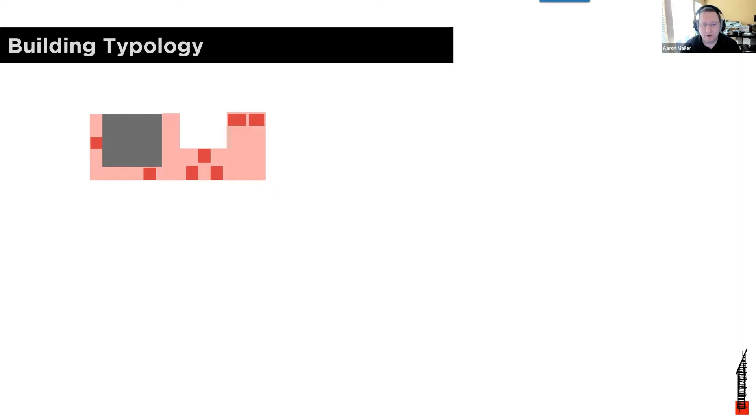So kicking this off, a lot of folks ask us, we have a lot of clients that do multifamily work. Whether it's tower and block style, where it's one large building and there's a bunch of different unit types within it, or whether it's something like garden style. And the reason I want to talk about building typology first is, unfortunately, when people ask us the whole links versus groups question, they think it's a one-size-fits-all answer. And it is, but there are some asterisks that we have to put on top of it.

So as an example, in a tower and block style building, there's really only one sub-element, and that's at the apartment level, right? So you've got a bunch of different apartment types, but there's really only one sub-element. That's a little different when you're doing garden style or multiple building scenarios, because now you've got the project as the whole, and then the first sub-element is, of course, the different building types, but then there's a sub-element of the building type, which is the apartments and the units. And while that's a nuanced difference, we do need to talk about it, because I would never tell any client that either links or groups work in both of these situations for every level of the subdivisions.

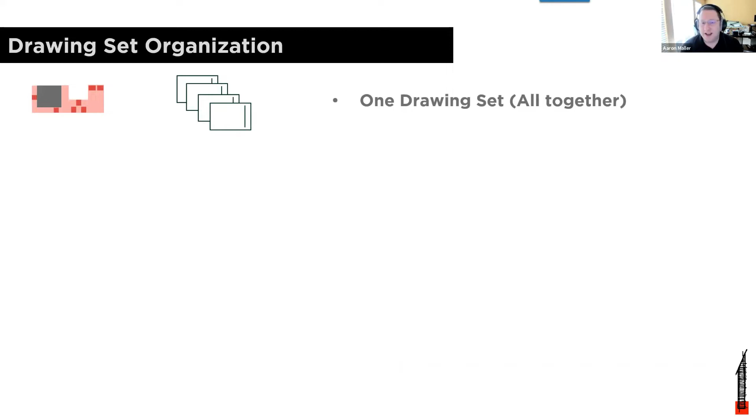Okay, so one of the first things that we're going to talk about is one of the first questions I ask project teams when they ask me how to set up their model: what's the drawing set organization, or how does the project need to go together? Because the top one is the simplest setup, right? So it's a block style building. There's one set of drawings. Everything is getting issued in that one set of drawings. So that's pretty basic.

Thank you. Okay, so the second setup is that there is one big drawing set. Everything is going in the one drawing set, but it is garden style buildings. And that is a bit different than this bottom option, which is that it's garden style, but each building is going in for a different permit, and they are completely different sets of drawings. Our answer to how to set that up in terms of links versus groups is going to change in those two situations. So that's why we want to acknowledge first that there are different drawing set organizations.

And one that's not really common in multifamily, I don't find, but it was very common in the retail world, is even when you have garden style multiple buildings, then the question does come up, are the drawings oriented to each building, or is the entire project just subdivided regardless of building orientation? We used to do this a lot for shopping malls because according to the code, even though malls had freestanding buildings, they were often evaluated as one large building because things like fire trucks couldn't get down the concourses and such. So anyways, we'll come back to that in a bit.

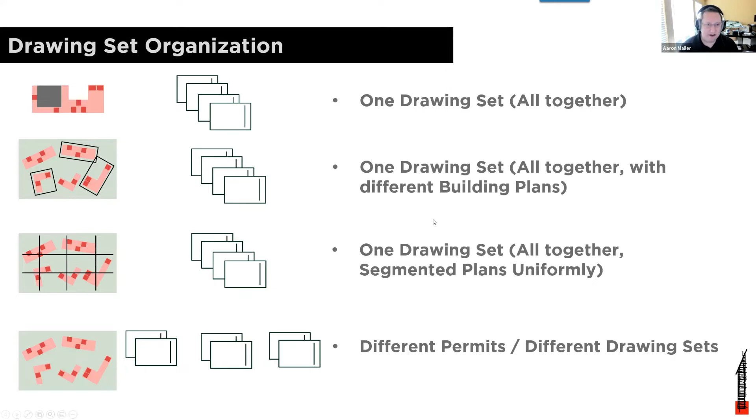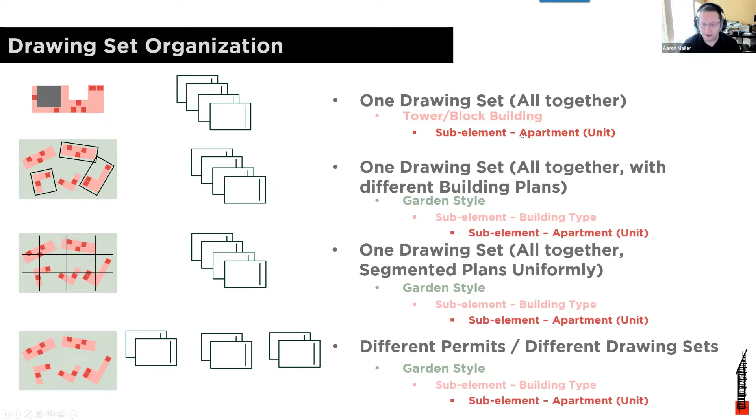I just wanted to kind of cover that in these situations, there are, again, different levels of sub-elements. So the tower and block building is the only one where there's just one hierarchy level. Okay, so let's cover basically the two easiest cases, and that is the apartments themselves, the bottommost level of hierarchy. And that's the one where, surprise, surprise, if you haven't already heard me talk about this, or if you didn't know what we were going to cover today, when you get to the actual apartments themselves, model groups are going to be a lot more sustainable than linked files.

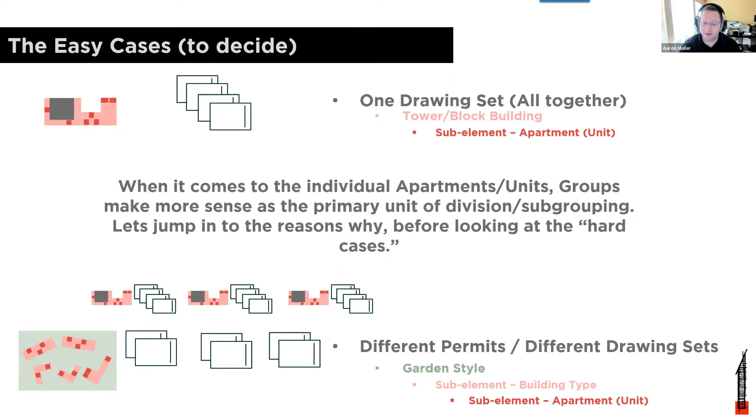But we're going to show you files that are using both, and then we'll talk about why that's the case. Then when we get into the edge cases that we talked about a few minutes ago, we'll look at where you end up with a hybrid approach where there will always be, mind you, model groups for apartments. You'll never see anybody at Parallax using linked files for apartments, but you will see us use linked files for buildings that then have model groups in the apartments. And so we'll jump into that.

Before we actually open Revit, I want to just run through really quick the pros and cons on paper, or what we think the pros and cons are for both groups and links. So if you were going to model a repetitious unit, which may be an apartment, it may be a patient room, or any similar kind of repeating unit, one of the things that's nice about groups is everything is all in one file. You're not dimensioning to things in a linked file. You're not tagging things in a linked file. It's convenient for editing because everything exists all in one file.

Now, this also shouldn't be understated, but another important thing is that when you're scheduling, they are actually different objects. So if I have a door that's in a group and I have 5 groups, there are actually 5 different doors and not one door that's scheduling 5 times, which is what happens when you have linked instances. Doesn't seem like a big deal when we're delivering design work, but when you get into owning the models downstream and wanting to populate them with either construction or asset data, it gets tricky when they are all just copies of the same linked element because they can't have discrete information in them.

When you want to annotate model groups, you can do some really neat stuff in terms of attaching detail groups, but also when you're modeling with groups, all the annotation tools are just the native annotating tools. So you're not having to get into the crazy by-linked view workflow or tagging through links and that stuff that we'll talk about a little later.

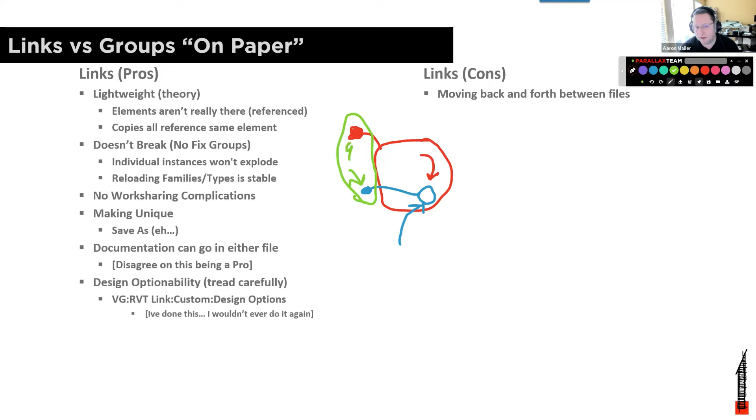And then you just need to remember that when you synchronize with central on this one, somebody will want to reload it in that one because that doesn't happen automatically. All that said, it still stinks. Being in 2 files and having to move back and forth between them to do your annotating is absolutely abysmal. And then you also get into this complex situation of how are you going to do your actual drawings? And it's not a simple question.

There's a whole lot of stuff to unpack here in terms of, are your plans to tag in the main model and tag objects in the linked file, which is what we call tagging through a link? Or is your plan to go into the linked unit and do your annotations there and then use by linked view in the main model? So those are kind of 2 completely different options that you have, and they both have some pros and cons.

One of them being edit cut profile doesn't work. So I'm not sure how many of you use edit cut profile a lot. We use it all the time. Instead of using filled regions and masking regions, you can use edit cut profile to modify layers of things like wall sections and plan details mildly to get them a little more augmented than how they look live from the model. Well, you can't cut profile if you're in a view that is touching linked objects.

So if you want to do cut profile, your only option is to go through the linked file, which then means that now you're having to go into the linked file if you want to do your annotations, and then you have to set your main model to by linked view. That has a whole lot of downsides. Let me see, is that the next thing that comes in? No. Okay, so there's a whole bunch of downsides to having this model here and then having this down here, and then this is set to linked view.

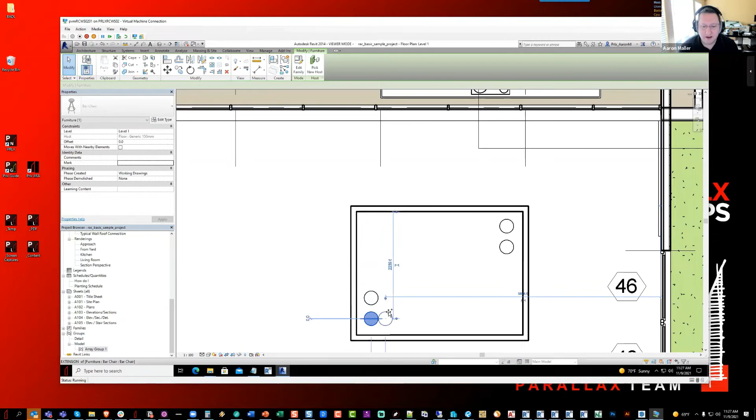Okay, so here we have a little group, and I'm going to select all this stuff. It's just 4 walls and a couple of chairs. I'm going to group it. And if we really quickly look at all the things people told us never to do with groups, such as we're going to rotate the group, it's going to work fine. We're going to mirror the group, it's going to work fine. We're going to mirror the group at a funky angle, it's still going to work fine.

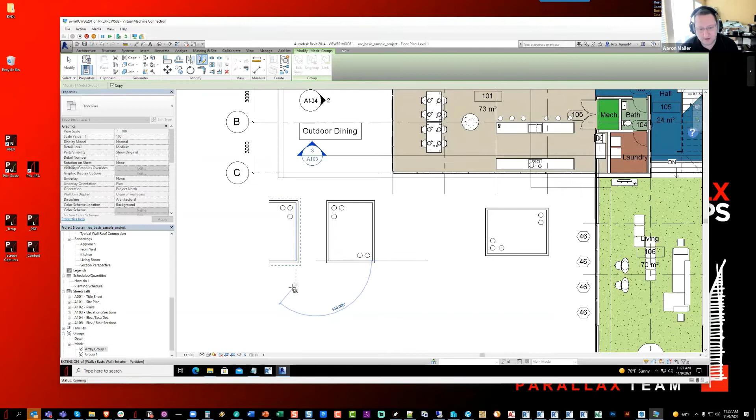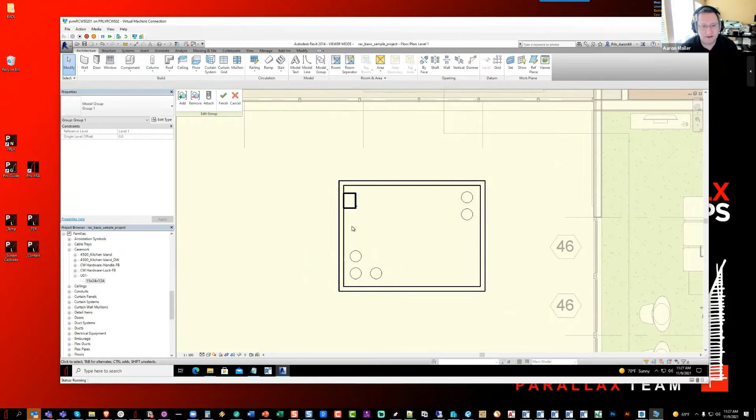Okay, but it is very much true that there were things that could happen to groups that would suddenly make those things not fine. So if we were to grab a cabinet and place it on the wall, boop, like this, and we'll just do one for now. So if we do that, and then we were to copy the group again, and then we were to rotate it, you'd see that it's still working okay, and then we could mirror it again, and you'll see that it's

still working okay. So it took us a lot of trial and error to figure out exactly what the problem was, but it is absolutely true that back in 2014, you could get into situations where the moment you went to mirror a group, things would freak out like this. Now, in this case, it worked, but it ruined a cabinet. But the only reason it worked was because I had not copied the group. And obviously, if you try to copy it, now you get this disaster right here. And this is a lot of what started the reputation of groups simply can't be mirrored.

Now, what made me go down the rabbit hole of wanting to find out what this problem was is at my last firm, before I started Parallax, we worked on 2 different types of projects that used repetitious groups. We did multifamily with apartments, and we did hospitals with patient rooms. Now, one of the big differences in hospitals, patient rooms, and multifamily apartments is the number of items that are getting placed on the wall was vastly different.

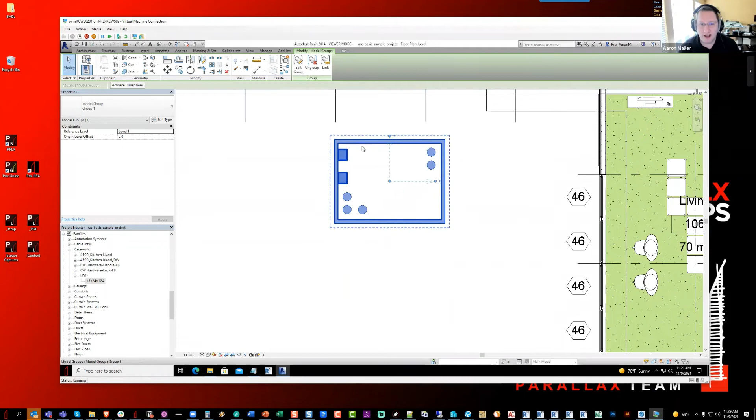So if you consider a patient room that has a medical head wall, there's really only one head wall placed on the wall. But if you think about an apartment with cabinets, many cabinets get placed on the wall. And so the trouble is, I was comparing the patient room, which only had one head wall on the wall, to the apartment, which had multiples. And of course, this is where you'll see that this group is now behaving exactly how we want it to, whereas this one is completely having all kinds of issues.

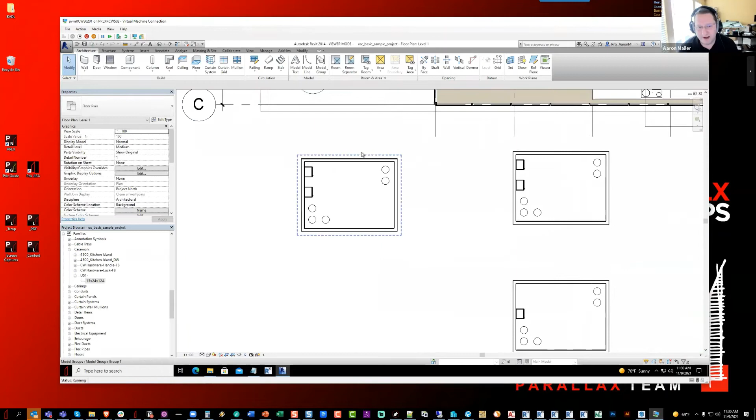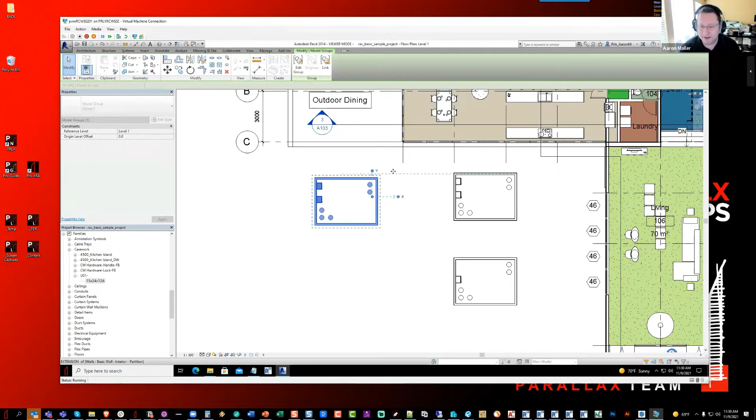By the way, a small interesting bit of information about this is these things that failed were also failing because of some erratic math function. If you were to rotate this group by 88 degrees and then ask it to rotate it by the last 2 degrees, it would absolutely work and it would absolutely be stable. There was something about the values of 90 and 180 and 270 that made these kind of things fail. So for a little while, it was simply a matter of us telling people always go by 88 degrees and then do it 2 more degrees. Why? I don't know why, go have a drink after because it's annoying. But that's kind of what we had to do.

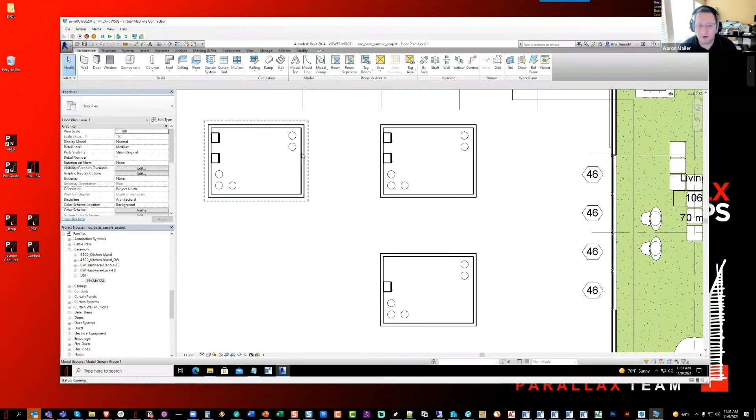And then we started looking into, well, what is the difference between these two groups and what is causing this functional difference? And what we come to find out is the difference really had to do with the fact that the casework was modeled as face-based families. Now, that's on me, by the way, because this is an old library that I built of millwork. And what we discovered is there seemed to be a glitch in Revit at the time, or a glitch in the matrix, if you will, and it had to do with the number of face-based objects and the number of faces they were hosted to. And we found this out because we were troubleshooting the difference between our hotels, our apartments and our hospitals, and we were like, that can't really be the case, right?

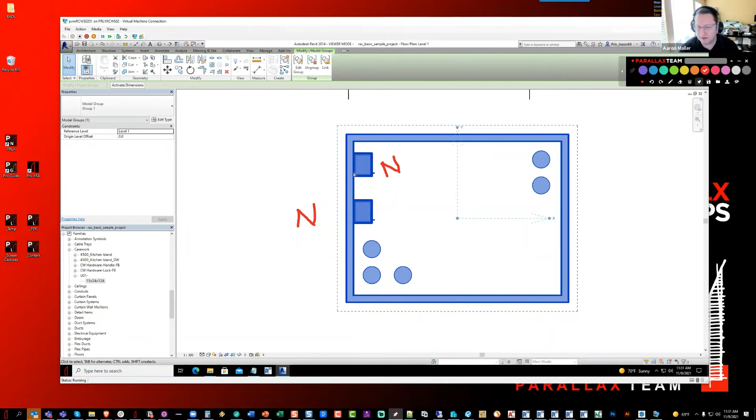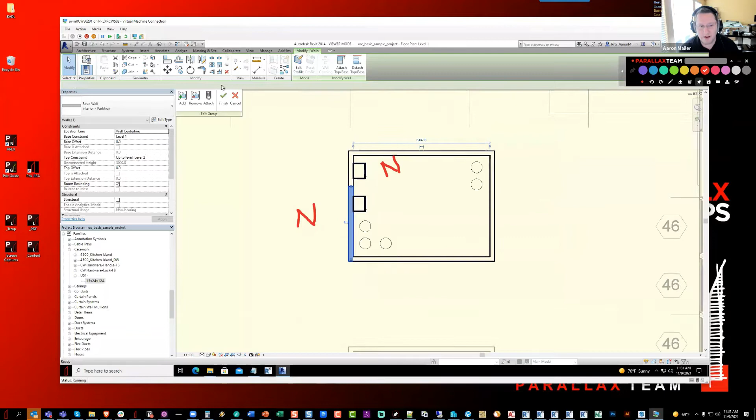But sure enough, if you were, that is the wrong command because this is not really my computer, if you were to split the wall, so that there now are 2 discrete walls, and you were to use pick new host such that now this cabinet is hosted to this wall and this cabinet is hosted to this wall, all of your group issues will have gone away. Now you could copy this group and you could rotate it the full 90 and you could mirror it and it wouldn't break.

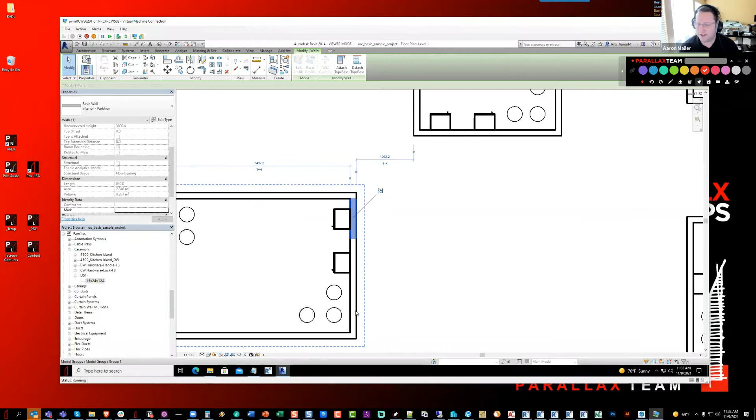So the takeaway from this, by the way, this is not a sustainable answer, right? This was part of troubleshooting. This was not so we could recommend this workflow to people, because if you can imagine, if you had 15 outlets on a wall, you can't break the wall into 15 pieces. The purpose of this exercise was just for us to ascertain what was the problem with model groups that was contributing to this reputation of can't rotate, can't mirror. And it turns out the whole time it was face-based or work plane-based families that were hosted to the face of the wall, and there was more than one object per hosting face.

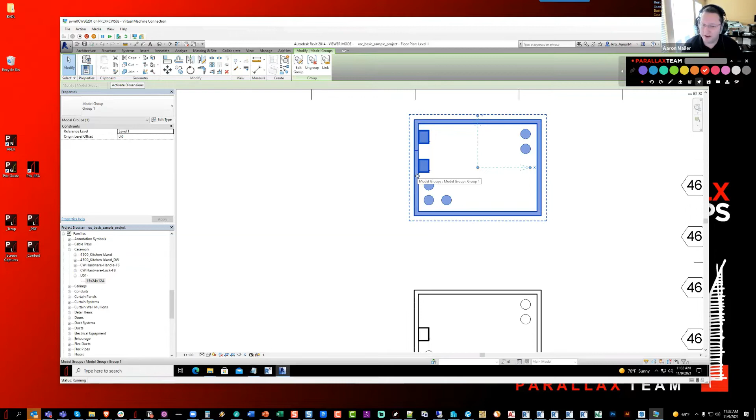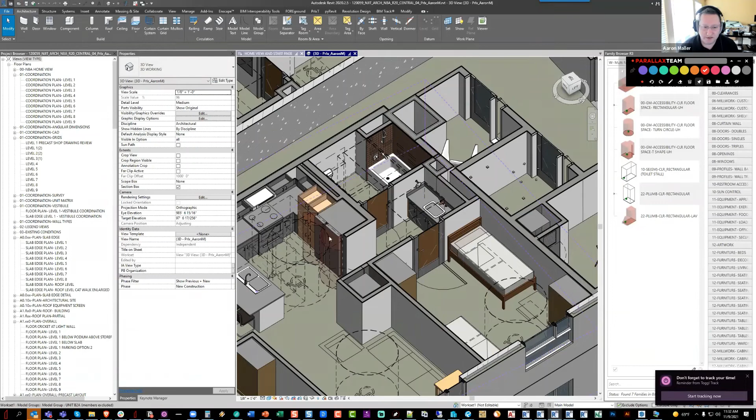So what was our takeaway from that? Really, it was just start switching everything to unhosted families. Get rid of the face-based outlets, get rid of the face-based cabinets, and start converting all of our millwork and things of that nature into completely unhosted families. And I happen to have the cut plane here cut so far that you can't see any upper cabinets. There's an upper cabinet. You'd have to take my word for it, but this upper cabinet family in our new Parallax library is completely unhosted.

All of our clients, and by the way, two of our clients have been gracious enough to actually let us open their projects so that we can show them in this demo. That's Niles Bolton Associates out of Atlanta, and Michael Graves up in New Jersey. So this is basically a 30-story building or somewhere close. I'm sorry, this one is 9. The other one that I've opened is 30.

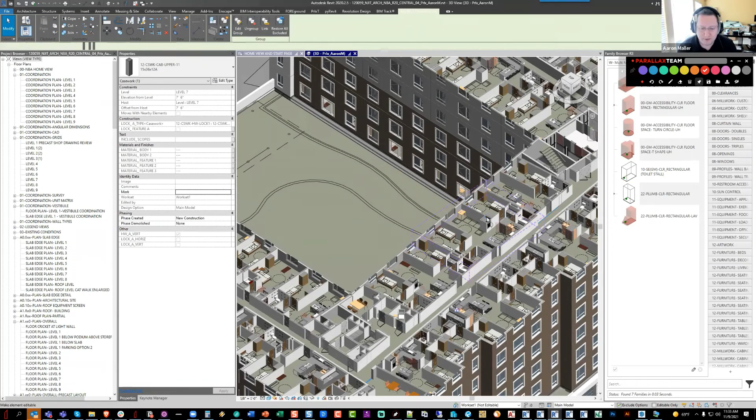And you'll see that here, all of the units have been done as model groups. A bunch of them are mirrored. A bunch of them are rotated. They don't exhibit any of that bizarre, anti-group, fixed group issues and all that kind of stuff. The whole Achilles heel of these behaviors in model groups has been having hosted or face-based families. Unfortunately, that also includes line-based families.

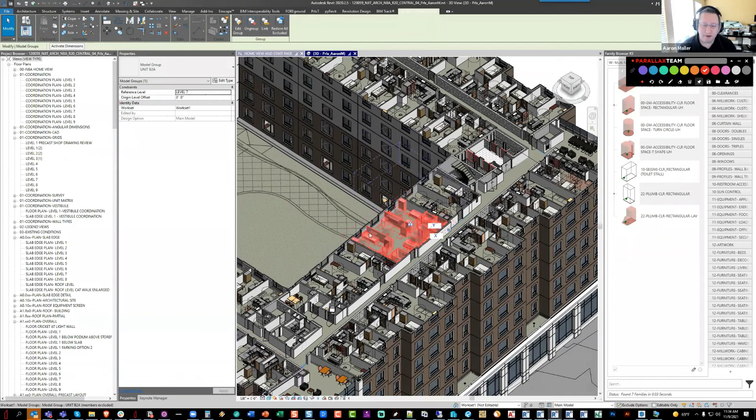So we did have to go through our entire library offering and basically say, you know what, line-based families are great for a bunch of things, but we're never going to make line-based families again. Face-based is handy. We'll use face-based families where they need to actually cut holes out of things, if they need to go on the outside of the building, but then those things don't want to go in groups per se. But our base libraries have all now converted to unhosted.

So it is true that when you have tons of model groups of things like apartments, they're going to make your models huge. And it's also true, and I have tons of sympathy for anybody on the call who does programming or works with the Revit API, groups basically have a super limited API in Revit. That is true. But there's often a false correlation here in terms of, do my models get huge?

Yes. Do my models perform poorly? Yes. Well, then these two things must be related. And that's unfortunately just completely not true. We make a logical leap there. And so one of the things I wanted to show you is that right now we have, oops, I need to close, I got the wrong thing open here.

So we have a ridiculous amount of models open right now so that we can look at them in this lecture. So this one is a 9-story tall block style full U. I haven't counted exactly how many units there are in the building, but I could. We have another one open that is much taller. No, I'm sorry, it's a little taller. It's 15 stories. And again, all the units fully populated. This one has all the furniture in as well. Much more dense style building.

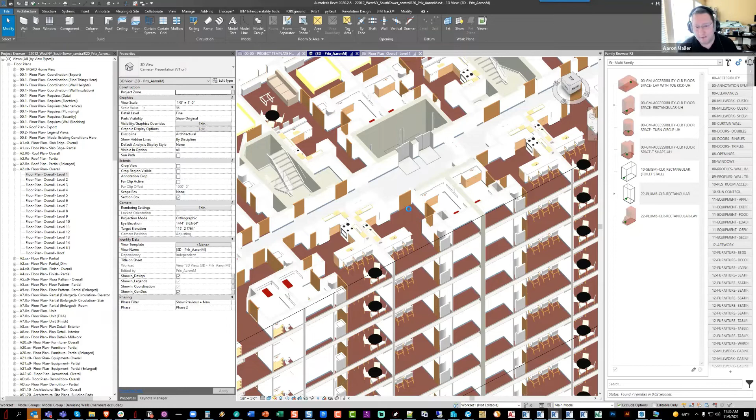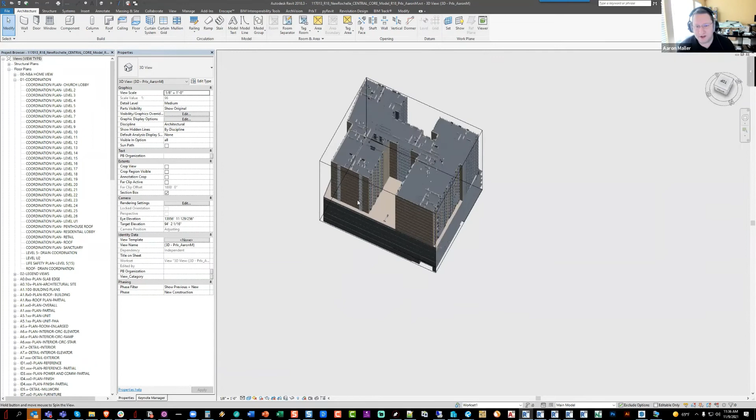You'll see here, and actually I've even got shadows turned on like a jerk, which I didn't realize I had. But you'll see here that the performance is pretty manageable for being 15 stories. I've got an older one that I opened just to kind of demonstrate this. And so this one is 26 stories. Now this one is 2 files, but that just has to do with the fact that there was a core and shell architect and there was the fit out as well.

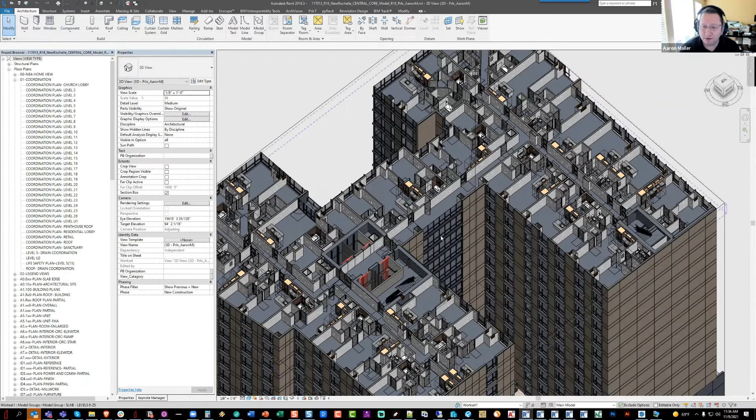But you'll see here again, all the units in one file, all plopped in as model groups, performance pretty manageable. And again, I've got a bunch of graphic effects turned on, so you'll see that it takes a couple seconds to regenerate. Here's what I wanted to show you. Because I agree with most of you, if you are one of the folks who's thinking that on paper, links should completely be better than groups. I thought that as well, which is what sent me down these roads eventually to do some of these studies. So what we did before today's demo is we took a much smaller project.

Now, oh great, my sync with central timer is going to make me do my sync. Now, this project is not just one building. It's 4 buildings that are next to each other, but you'll see here that they are much smaller buildings and they're all only 3 stories tall.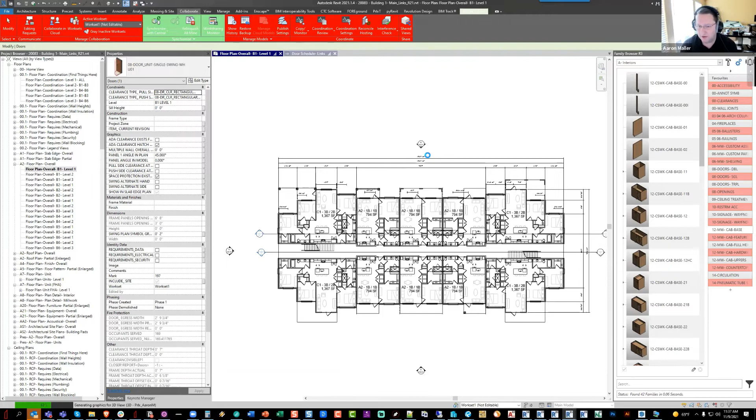But I want you to watch when I go to kick off the 3D view, which already exists in this file, by the way. So it's not generating the 3D view for the first time. The disparity in the amount of time that it takes right here to actually show this model. So not the time to actually move to the 3D parallax view, but the time to actually present the model to everybody.

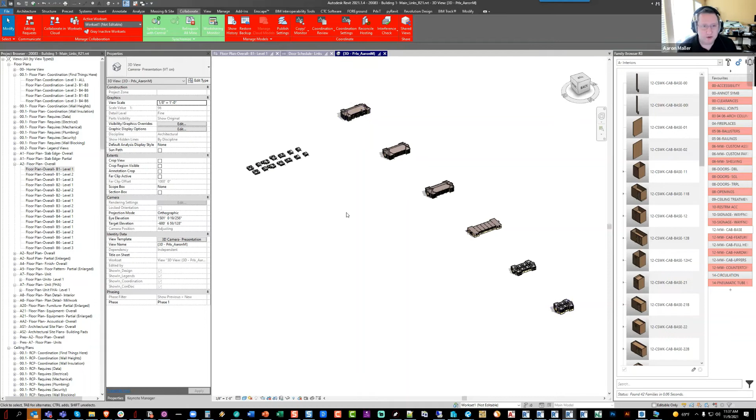This disparity here has to do with the fact that the units were all converted to links. So I was wrong. It's 6 tiny little buildings. But you'll notice here that again, anytime we orbit now, the regeneration time is abysmally slow by comparison. And these buildings are tiny, so it's not even a one-to-one comparison. We don't have the exact math on this.

We could actually take the RFO benchmark and kind of manipulate it to show the differences in the performance. But there is this interesting, what appears to be some sort of a linear relationship between the count of the links that exist in the project and the performance degradation or slowdown that happens.

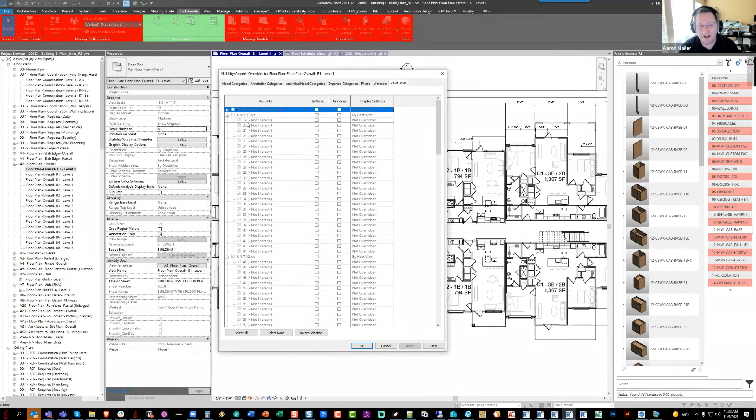So if we were to jump into VG and go to RVT links, of course, you'll see here that in this particular sample, we've got all the units that are done as the linked files. So what we may do one day, because it would be kind of an interesting exercise, unfortunately, it's hard to just invest the time in it, it would be fun to run some timed exercises in terms of view regeneration and whatnot, and compare how many unit links there need to be before the performance starts to tank.

But it is noticeable, and that's where a lot of frustration starts to come in for the users who are trying to manipulate these things and they're just watching the spin wheel all day. It doesn't look like it's a very large amount of time, but even just that few seconds every single time you want to regenerate or move the file is a bit much to take.

So let's see, we'll let that kind of regenerate itself over there, and we'll jump back to, let's see here. We'll go back to this one just because this one's pretty easy to look at. And then we'll jump back over here. Okay, so we're going to go back to this briefly.

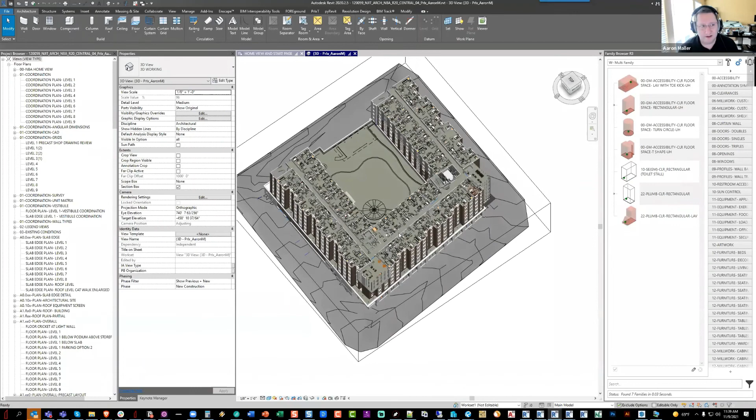So we have found, though, that we can mirror, we can rotate, and groups in groups is an interesting debate. So I have a suspicion that a lot of what people think is bad about groups in groups stems from the fact that their groups may have been plagued by the earlier problems that were causing issues with things like rotation or mirroring. Because I can tell you that Niles Bolton, one of our clients who basically created this building here, they are strong proponents of groups in groups as we are.

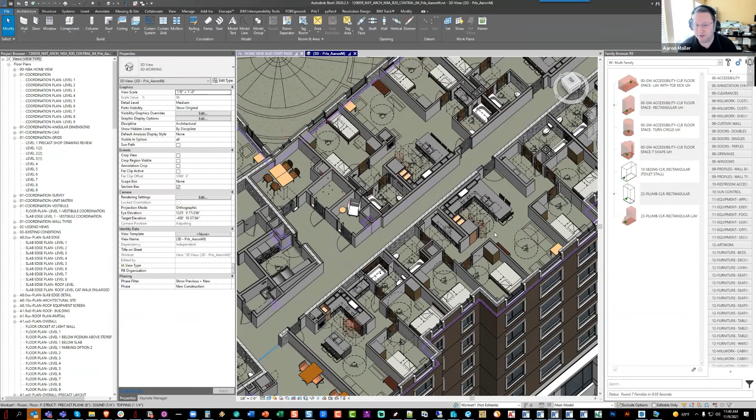And they've even done some interesting things where if you were to go basically into a bathroom, there will be a group for the unit itself. And then there may also be, I would probably struggle to find one at the moment if I go look, but there will be basically bathroom groups inside the unit groups, kitchen groups inside the unit groups. And similarly, if we were to jump back to here, I'm just looking for some dead space to draw a picture.

Back when we were doing patient rooms, which we still do out of model groups, and patient rooms are probably the most aggressive in terms of doing this, what we will actually do is have the entire patient room as a group, and then the head wall is a group inside, the side wall is a group inside, the other side wall is a group inside, and the foot wall is a group inside. And then sometimes we will also have the furniture as its own group in the middle, and then we will group all of these. So why do we do that, by the way?

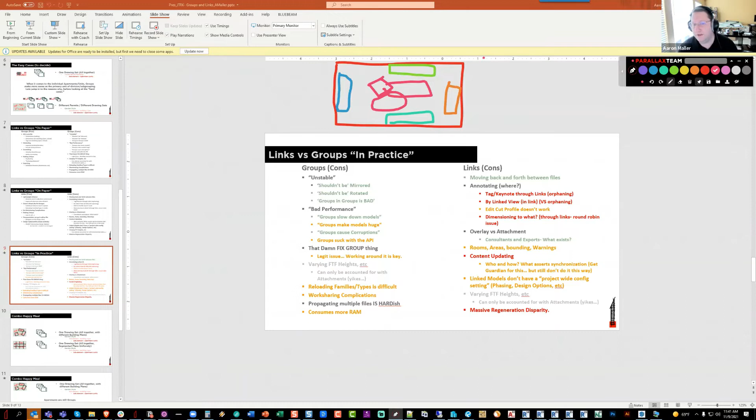Because the same problem exists for apartments that exists for patient rooms, which is that usually when we say they're all the exact same, what we mean is they're pretty darn close, but they may have a variance of like a 1/2 inch to 1 inch, side to side. The demise walls might be in slightly different locations.

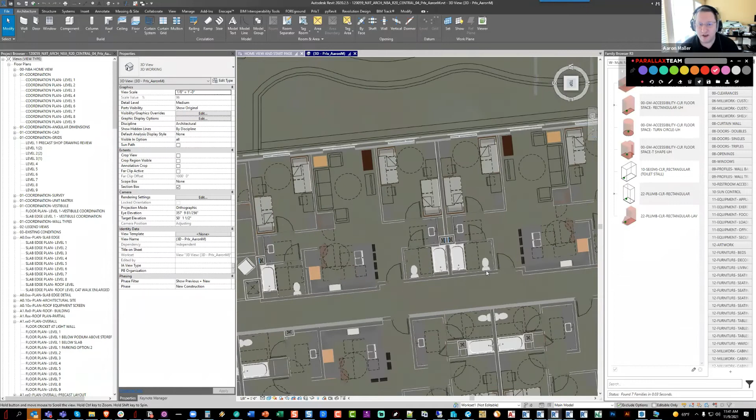So if they all are exactly the same, then having them as one discrete unit group makes a whole lot of sense. But if they're going to vary a couple of inches here and there, or a couple of fractions of inches here or there, having the side walls and the head walls as their own subgroups means you still don't have to edit the 15 different size variations all separately.

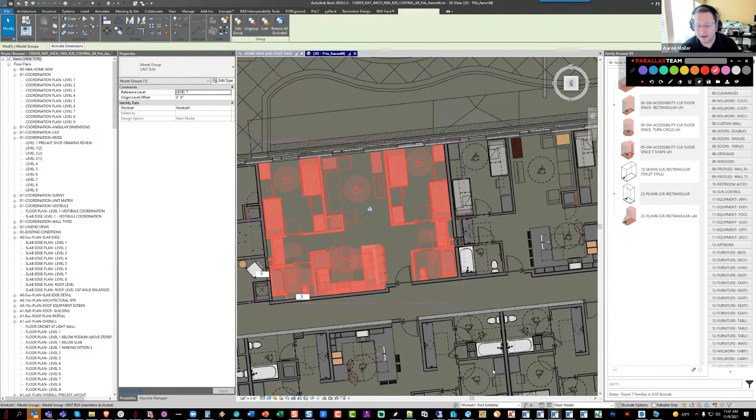It's actually been pretty cool because we're working on a hospital right now where we're actually modeling all of the head walls for prefabrication for the contractor and the subcontractors. And again, there's 15 different rooms that are all supposed to be exam rooms, but they're all slightly different sizes. So having the groups in the groups is helping us in that situation.

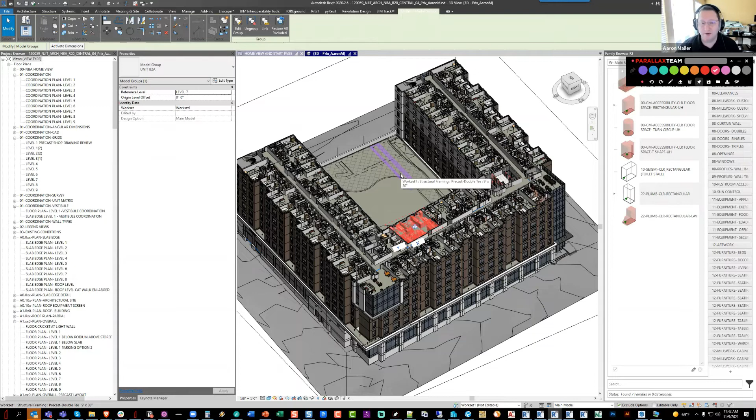And actually our head walls are even groups in a group in a group. They're 2 levels down. The subcomponents for the head walls are. So if we jump back in, let's see where we ended up here. So we talked about the bad performance.

Okay, so the fixed group thing, that is a real situation that needs to be dealt with. And so the trick is that we're hoping once you've started mitigating the issues up here, this will still happen, but it happens less. And if it happens less, then it's just a matter of educating the users on how to deal with it. Okay, so the moment fixed groups comes up, we need to work through it. The way to work through it is always to select make new groups and never select ungroup.

And once you've done make new groups, you need to go to the project browser, look and see why are there new groups, what's different about them, switch one of them to the other one, and then get rid of the erroneous group. It's miserable, but it's still certainly better than letting somebody hit ungroup or not teaching them how to work around the issue. And again, we're going to kind of ignore the varying floor-to-floor heights because there's nothing that we can really do about that. And reloading the families and types definitely is difficult.

So here is kind of where, when somebody asks us links versus groups, right? Because if you're looking at this list here, it still doesn't sound amazing. But here's what's interesting about it is we have the green issues, which we can totally solve. We have the orange issues, which are real, but there are techniques to working around it. Now, if we start going through the same list for the links, so moving back and forth between the files, it's annoying, but we can do it, no issues there.

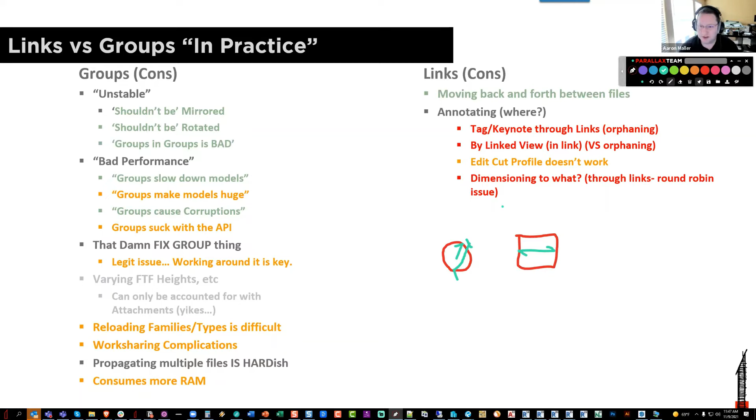So interestingly enough, if you want to dimension a round column in your consultant structural model and you don't want the dimension to keep disappearing, if you actually tab select when you dimension so that you get the invisible references of their reference planes instead of actually using the diameter or the radius, that dimension will suddenly not delete itself next time you reload the link. Crazy random issue. Just thought we'd bring it up.

Okay, so zipping through this. Again, you still have this issue of overlay versus attachment and what exists for your consultants. And that's a big deal because your consultants may not be seeing the whole building, but it's solvable. You set it all to attachment. Everybody hates you, but it's not the end of the world.

So the rooms and the areas and the bounding warnings, there really aren't fixes for that either. So you can kind of get around it. You can work through it by simply not unloading the links and then not having to deal with the performance disparity once that started to happen. But again, the reality is solvable. So we're going to just call that one an orange.

But the content updating is another one that there really isn't a good way to solve. So when you have a main model and then you have all these linked units, how do you update things like doors or furniture or millwork families? And with something like millwork, that gets to be really interesting because what a lot of people forget is if I were to come in and load some cabinets, oops, that's not the right one. That's probably not the right one either. You need to deal with the fact that all of these types could potentially have different parameters in both the links and in the main model. And again, that's where something like Guardian can really help with managing that.

What I am happy to say, by the way, and I'd only be able to show you this if we actually had the linked project back in 2014. They have in recent years at least made it better. Oh, I can't, okay, I have to synchronize before I can get to my other ribbon, sorry.

It used to be that another big disparity in the performance happened when you tried to draw a section mark or an elevation mark. The moment you started dragging this view command, you would start getting the spin wheel, and you had to wait for the spin wheel to stop before you could click the second dot. And if you didn't wait, it didn't do anything. But if you moved the cursor again, it just kept spinning.

The nice thing is they do seem to have fixed that in recent years. So now if we go to draw the section mark, you'll see that it's almost instantaneous and you're just waiting for the regeneration after the view is created.

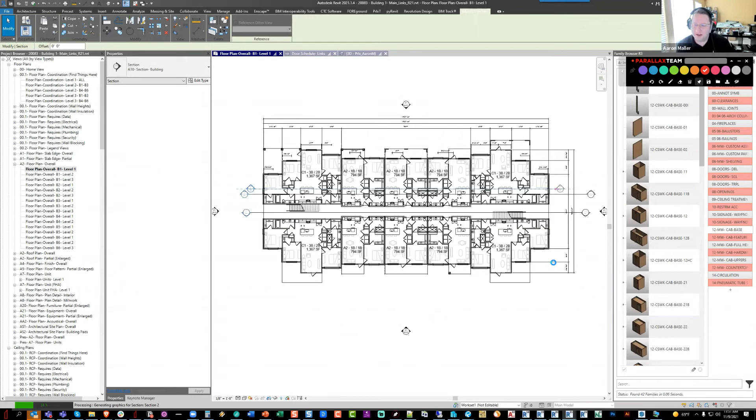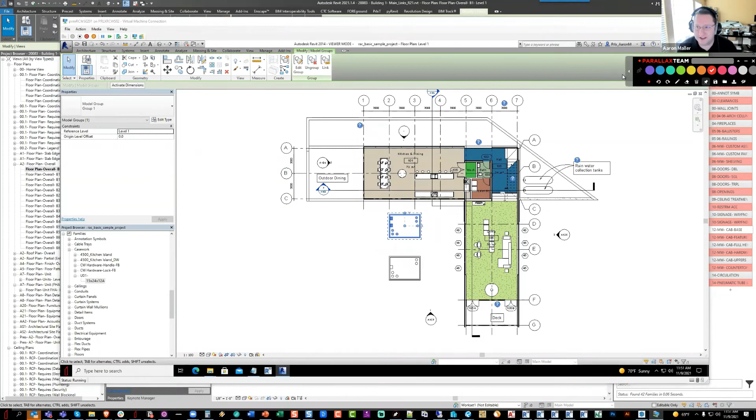If we were to do this exercise where we converted one of the projects back to links, it would be interesting to go back and do that in 2014 and see if the old performance disparity still exists there. Unfortunately, I'm running 2014 in viewer mode because we don't have any 14 licenses anymore. So if anybody has 14 licenses, we could potentially get together and just see what that looks like. But we know the disparity existed at least back in like 2012, 2013. So it's kind of a non-starter, really.

So all that to say, there are just a couple more things I'll run through. Obviously by now you can see that we use the model groups as what we'll call our smallest repetitive unit, which is the apartment itself. There were the combination or hard cases that we talked about. So what do we do when it's one drawing set, but there are multiple buildings, or it's multiple buildings in just a grid divided drawing set, which is still all one drawing set?

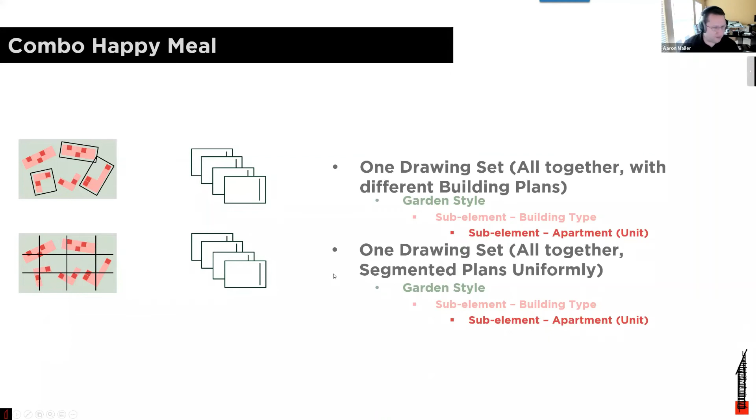This is where we will kind of combine the two methods. We'll still do the apartments as individual groups, but then we will do typical buildings as linked files. So if this is building type A and this is building type A and they're the same, we will do building type A as a file. What's nice about that is you'll actually go in building type A and do the plans for building type A. That means you're still just interacting with unit groups and you're doing all your dimensions within the entire building.

But then if you need to have an overall plan of this campus and you want to show the dimensions on it, you can set building A to by linked view floor plan. The difference there is your number of by linked view settings, you've got 5 to 6 because there's 5 to 6 buildings. You don't have 50 or 60. And there's something else that's interesting that you can do. I'm just going to draw this out in space because it's kind of interesting.

One of the questions always becomes, well, we want all these plans to be orthogonal in our documentation, but we might want to build a site model. One of the things I tell folks is I don't believe in documentation models. I always pick the largest building, and that becomes the one that has all my sheets in it, because having one extra model where everybody is always in a linked model because they're working in a sheet model is kind of annoying. So if I have 3 building types, but maybe there's 6 or 7 buildings on site, I'll pick the biggest building and we'll call this building 1.

And that becomes my documentation model. That's where all of my sheets live for all of my buildings. Now, what's interesting is you can also have a site model that looks like this. And what I'll do is I will actually link in building 2 and building 3 into building 1 just to do my linked view documentation that goes on my sheets. But when I link them in, I'll keep them perfectly orthogonal and just drop them in my drawing set. That way, I'm not having to rotate the scope boxes and reorient my plans and rotate all my callouts.

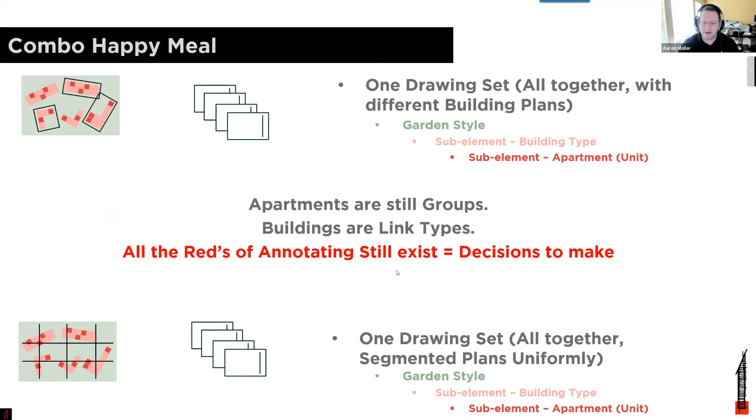So if you want to, you can actually publish multiple named places to each model. That way, both coordinate sets exist in there. You can do the same thing for your other files. What you end up with is you've got individual building files that are all straight on the sheet for your drawings. You've got a site plan model that still has all of the buildings in the proper context. But then when you go into each building, you're also still just working with the units as model groups, which means you get all the benefits of working with grouped files.

Let's see. Oh, this is just what we talked about. So the linked document, or the largest building, becomes the documentation file, and so on.

When we last talked about links versus groups, one thing that people asked about was how to move the documentation around with the groups themselves. And so what I'm going to do, let me see, what are we in, 21 here? I'm going to just start a blank project real quick. I should have had a blank file ready to go. I didn't think about it. We'll go in there. That's fine.

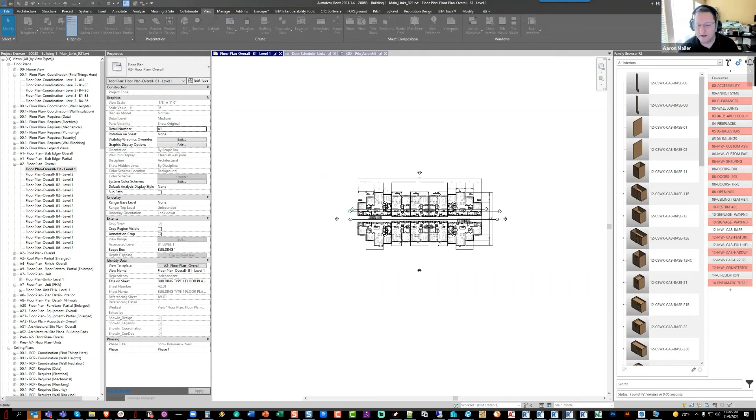So one of the things that a lot of folks seem to forget is that model groups can also carry attached detail groups. And we use this religiously. We use it in our apartments, our patient rooms, our head walls, and everything. And so you'll remember that on the insert ribbon, once you have a model group that you've created, you can save it out using either file export library, or you can go down to the project browser and go to groups and save out a model group.

We have to wait for my silly Keynote file to load here. I should have turned that off.

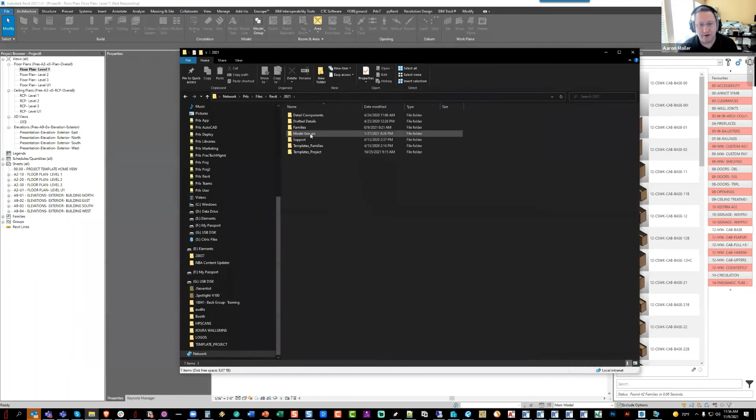So while we're waiting for that, if I were to go to my Revit share to 2021, and we were to go to model groups, we save a repository in our office. So we have healthcare rooms, we have apartments, we have entire movie theater rooms, and we have things like restrooms. And they are not just model groups that have the geometry in them. They can be fully annotated with as many views as you want to have saved in those objects.

So if this thing ever finishes, if it doesn't, we'll just go use another file. Should be done any minute. Everything else I have open. Here we go.

Okay, so let me answer these couple of questions that are coming in while we're waiting for Revit. So Jason says, I'd love to know what the threshold would be. Oh, that's for the performance degradation and links. I would say anything over 50 to 60 links. So here's what's interesting about that, Jason. We do see a performance degradation even when architecture breaks their file up into 2 links. So when they even do core and shell versus interior, there is a noticeable slight performance degradation. What we have to investigate is how linear that progression is. So it's certainly not exponential.

Like if it was exponential and we had 60 units, the entire file would just be crippled. So the fact that we can have 60 unit links and the file still functions, it's probably like a linear regeneration amount. But yeah, it would be interesting to see.

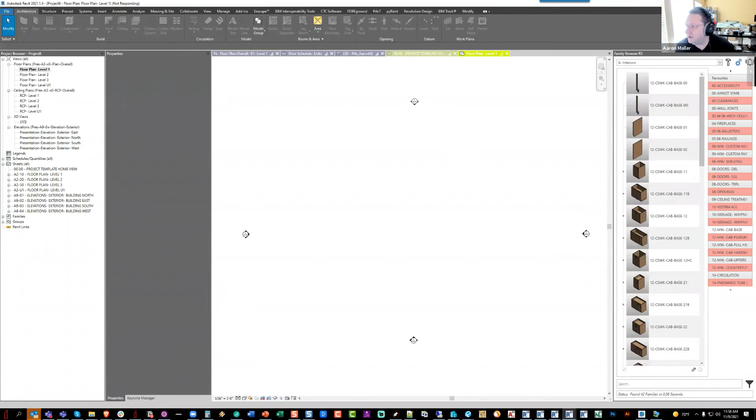And Jason asked a question on the linked models before placing in the site model. Would you use the Project North versus True North option in each model or not set that at all? Yeah, so good point. We absolutely would set up True North, but it's important to remember that True North is a setting that is part of the named places or the shared coordinates, right?

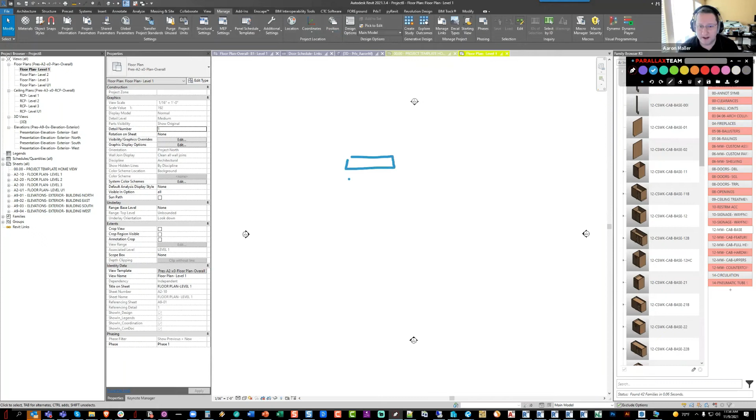So the reason that's important is in that little demo project that we sketched out, there was like building type A. But then when we were in the site model, building type A existed at 2 different orientations. So what you would want to do is you would want to have named place 1 and named place 2. And I always personally use specify coordinate at a point and rotate true north. I don't ever use the publish acquire method, but you could.

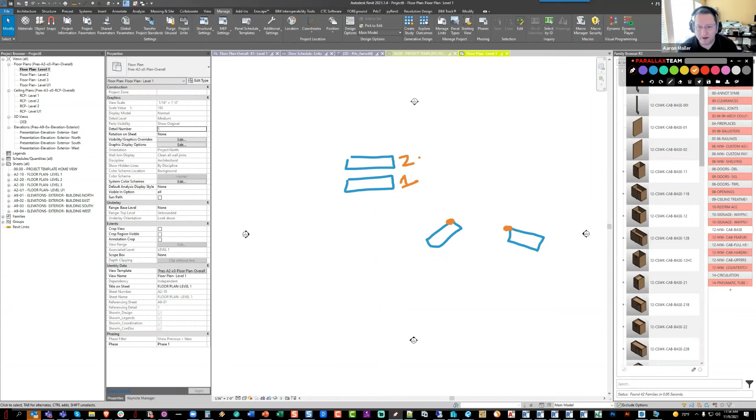But inside this building file, there's going to be 2 named places, and each one is going to have a separate true north. If we had more time today, I would actually run through it. But what that will basically do is it means that when you come in this location dialog, most people leave it set to what's called internal. But what you'll actually have in here in the building file is building location 1 and building location 2. And whichever one you use as make current, it will then rotate the true north between those 2 because each one has its own true north.

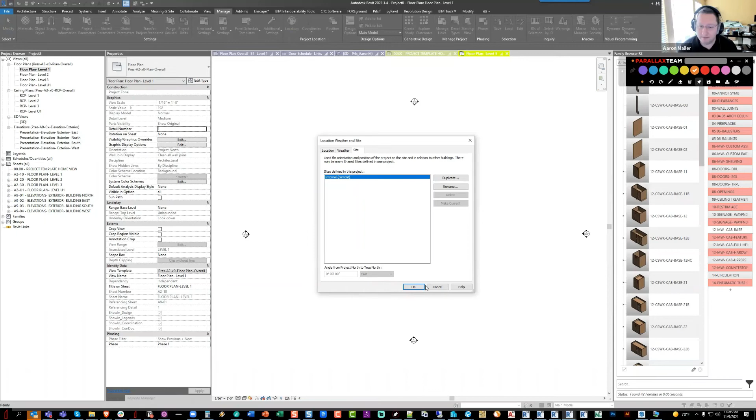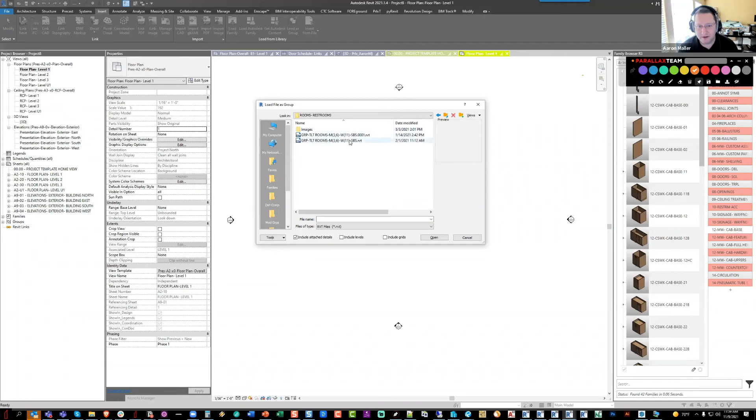So I'm going to come back, Eric, to your question in just 1 second. Let me start this process really quick, because what I want to do is do load as group on the insert ribbon, which is what allows us to load in a model group. And then I'm going to go to my model group directory here, and I'll just pull in a restroom as an example. It's the one I typically use for this. You'll notice here that there's an attached detail group option.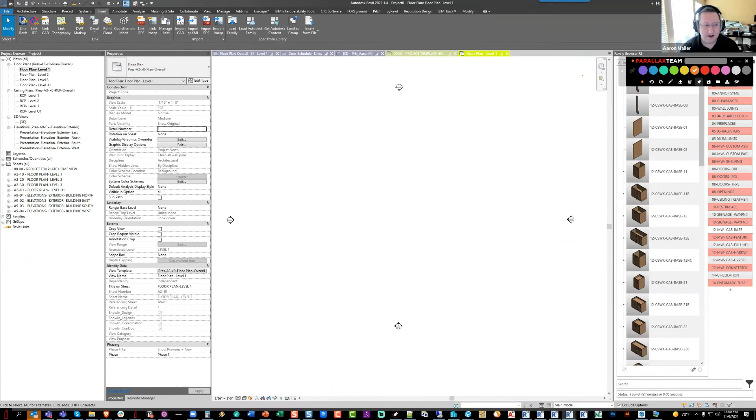So while that's coming in, Eric asked, do we ever exclude items from the model group, such as demising walls in the units? So interesting question. I would never recommend using exclude groups as in the Revit command, right? So they released that, I want to say version 9.1 or 9 back in 2007. You can now tab select an item in a model group and hit delete. It does what's called excluding the object. I would never ever do it. It starts to make things behave erratically, and the performance does get a little ugly as well.

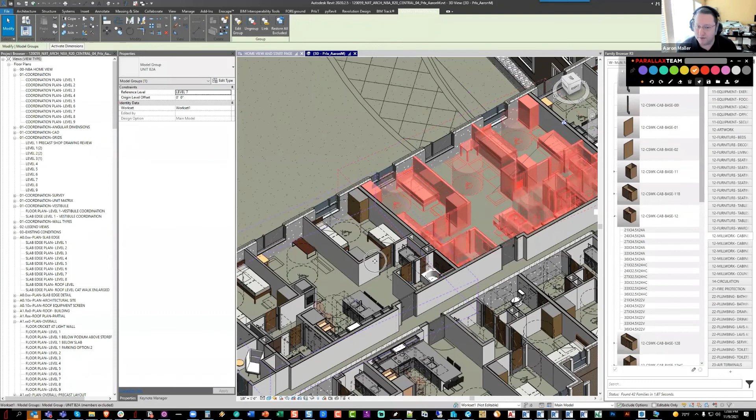Having said that, yes, demise walls don't ever go in the groups for us. So we always recommend, let me jump back. I know I'm jumping all over the place now. If you were to go here and select a model group, you'll see that the demise walls are not part of either of these groups. And that's pivotal, because you don't want to have demise walls overlapping. So demise walls, corridor walls, entry doors, and exterior walls, none of that is actually part of the model groups for us.

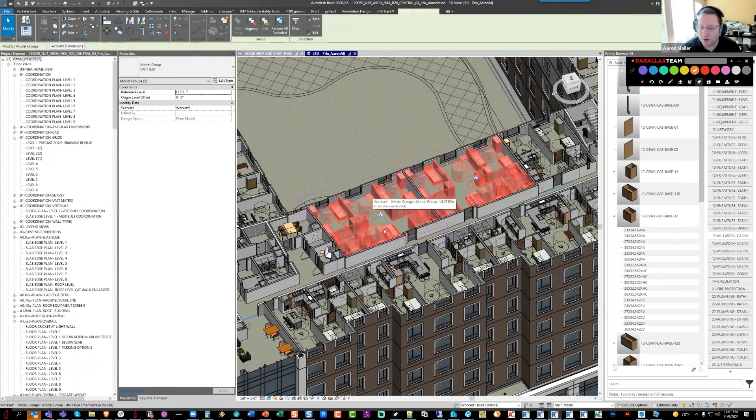I actually go one step further, and I sometimes start model grouping portions of the facade where I want repetitive units to have the same kind of alignment with the fenestration and whatnot. But really, you want the units to just be their own standalone thing. And what's also interesting about that is where we document the units is then in a standalone area as well, where we just draw in generic demise walls to say, refer to actual plans here.

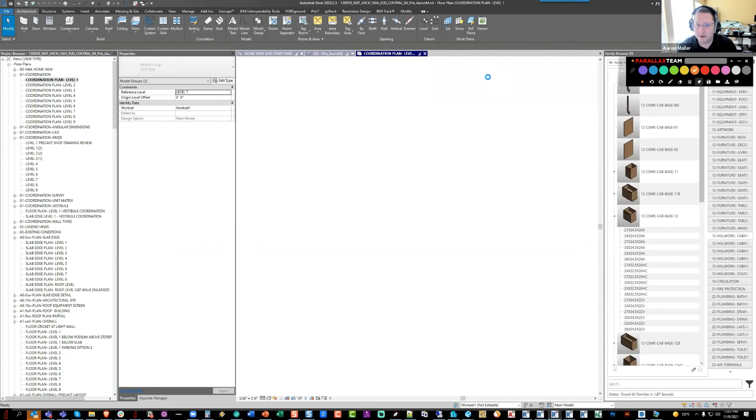But what's also nice about using that, we call it the unit cloud, is that all of our unit drawings are on sheets the moment we start a file. So you'll see here that this is basically what we call the unit cloud, and all the units get placed here, and none of these sheets have to be created. So our template starts out with 53 unit spaces, and there are sheets for all these units. There's multiple sheets, multiple plan view types, all that kind of stuff. So let me jump back real quick to that other demo I was going to do.

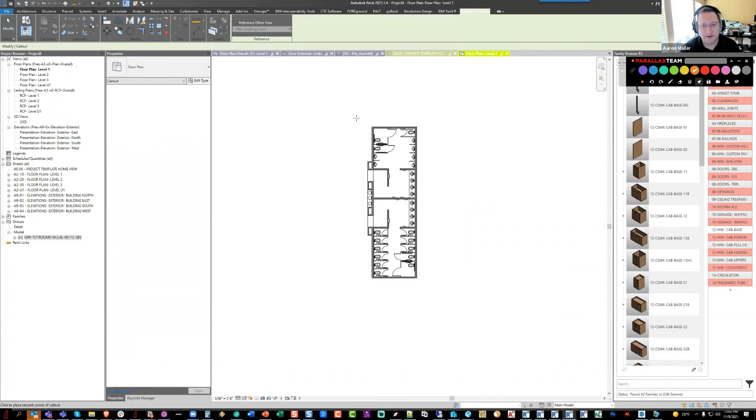So here I just pulled in a bathroom, and this is just a quick example to show you that when you make your model groups with attached detail groups, then what happens is you can go to a callout. I don't have a callout in this because I went to a stupid file. That's okay. So we'll make a callout here, and we'll go in there, and we'll say this is a 1/4 inch view.

So what's neat is you can be saving these things out to your library where they bring in all of their dimensions and all of their tags on your behalf. And this is not just true for bathrooms, and this is very simple to set up. Essentially, when you're making the model group to harvest it out of your project, you just also select tags, dimensions, lines, text, things of that nature, and you can save an entire library of these things and not be having to remodel them and re-annotate them on every project going forward. Hopefully that makes sense. I had to do that pretty quick.

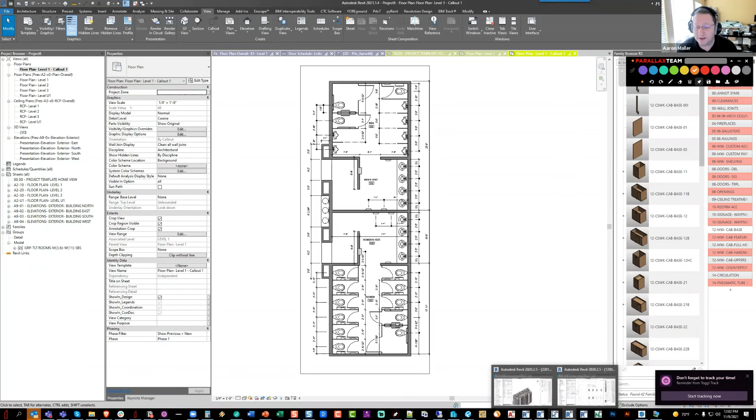And Kevin did ask, does that affect wall-hosted families? Yeah, absolutely. So you don't want to have them as wall-hosted families. And going one step further, you don't want to have wall-hosted families on the demise walls, period. Because again, the demise wall is not going in the group. I do know some firms like to actually break the demise wall into 2 pieces. I can't stand that solution because they end up with gaps in between them and they don't end up correctly.

So basically what I recommend is not having things wall hosted unless they absolutely need to be. Like our door library is still wall hosted, of course, because the doors need to be aware of the thickness of the wall. But that's basically the only situation where you want something to be wall hosted.

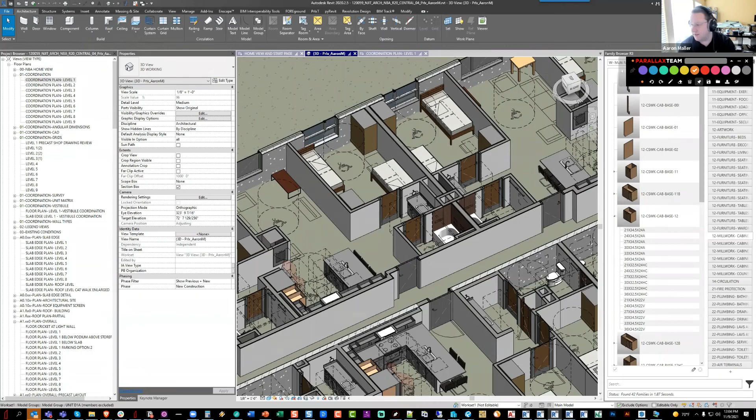So we have another couple of questions coming in. Let me jump into them real quick. So Eric says our interior team likes to model baseboards and chair rails as wall sweeps. It works much better with model groups. So there's a few interesting ways to handle that as well. I'll throw a couple of other kind of nuggets at you guys that may seem a little outlandish for a lot of you, but chair rails and baseboards come up a lot. And one of the things I actually recommend is, so hopefully all of you model your finished floors.

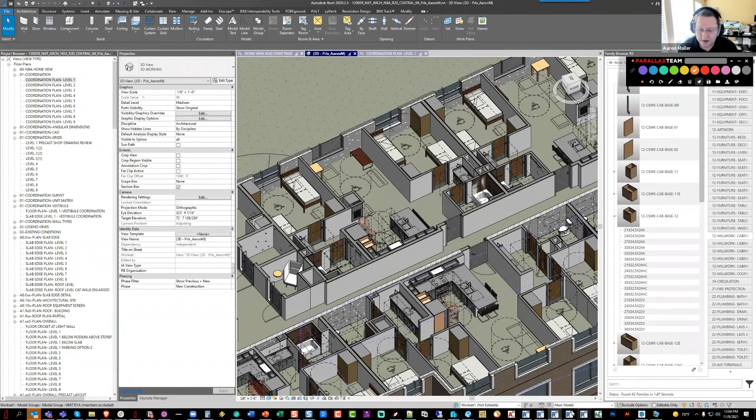But hopefully all of you model your finished floors. Let me just tab select this here. One thing I want you to notice is in this particular file, what's modeled as a finished floor is actually a Revit roof. This has a lot of upsides, and baseboards is one of them. So just something to consider. Here's a level and section.

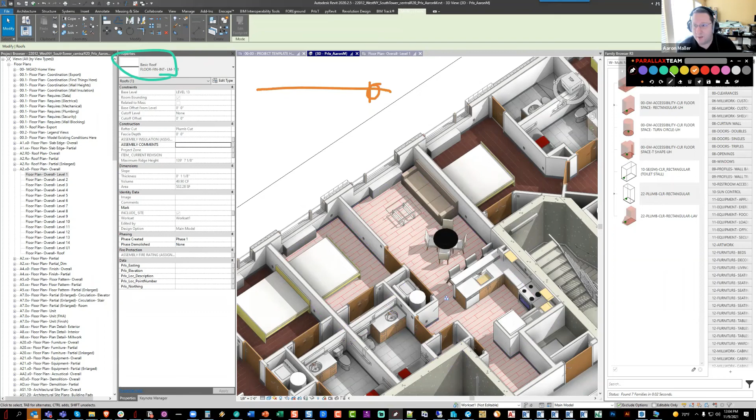And when you make a concrete slab or a structural floor, it starts at the level and it works its way down. This means if you use a floor for your finishes, you have to manually set their offset. So if it's carpet, you have to set it at 5/8 of an inch. If it's tile, you have to set it at 3/8 of an inch. If you use roofs, you leave them all at 0 because they build their thickness up. So a roof that's at 0 will always show the thickness of the finish correctly.

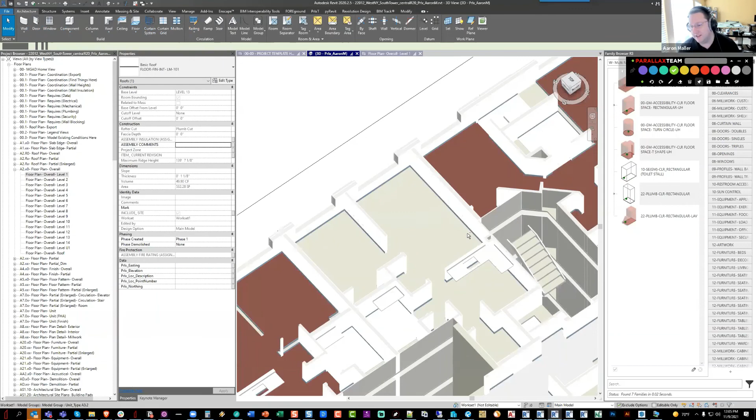And what's also interesting about that is they can then also host roof fascias, which work really well for things like baseboards. And then you're not beholden to having walls in your units for the baseboards. Similarly, crown moldings, and this gets into another whole story, we actually recommend using roofs for a lot of ceilings for the same reason. Our entire house has crown in almost every room. And if I had to finish a model of this house tomorrow, I would just use roofs for all the ceilings.

I'm going to jump to a couple of these other questions. So Beth said, how do you handle lighting in units if they're not face-based? So Beth, that's a really good question. Here's where things get interesting.

Until a couple of years ago, my answer would have been unhosted families, simply because you have an interesting situation with lighting anyway. So the fact that they're face-based is helping you put them at the right elevation. But if the ceiling isn't in your file anyway, like if you're MEP and the ceiling's not in your file, then you're not cutting a hole out anyway. So them being face-based is getting you the convenience of setting them at the right elevation, but still not cutting the hole. Unhosted can cut the hole if you use cuts with voids. It is one extra step.

If you're using unhosted families for lighting, then of course you want to use some other method to set them to the correct height. And that may just be an RCP that has filters on ceilings by height, or it may be something like Dynamo. But in the past, up until recently, we were pushing people towards more unhosted for light fixtures.

Having said that, Melissa in our office actually realized, the whole reason we went back to Revit 14 to look at those group issues, Melissa realized that some of the wonky behaviors of face-based families have been fixed in recent years. And we discovered that because we were expecting a group to break because it had some light fixtures in it and they weren't breaking.

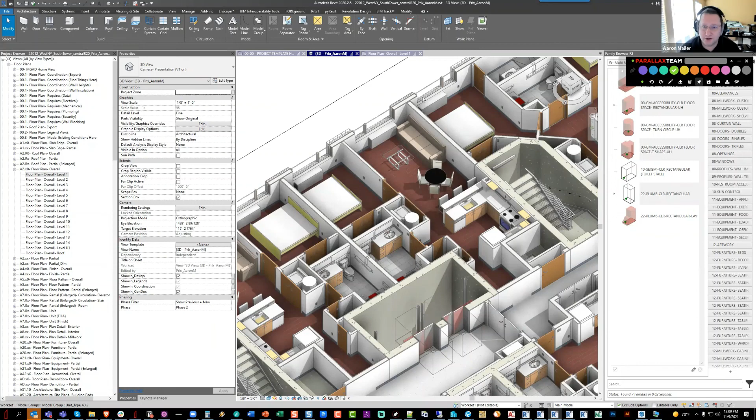If you have more questions about this stuff, it's a topic I'm hugely passionate about just because I really do wish doing design work wasn't so complicated in software, and multifamily and healthcare both have a lot of complexities given the mid-size repetitive unit. Fun fact, by the way, if none of you were using Revit back then, a lot of folks don't remember that groups used to actually be their own file extension. There used to be RVT for projects, RTE for templates, RFA for families, and RVGs for groups. That disappeared one day and groups just became RVTs, just like Revit projects, which was kind of interesting.